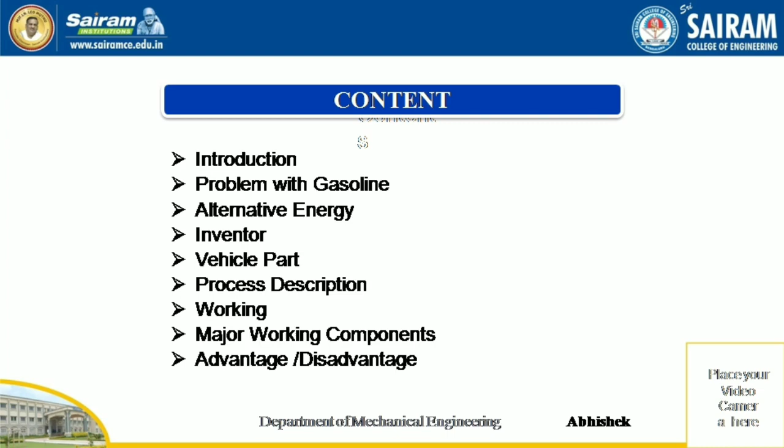Coming to the next point, we have the basic content of the topic. Firstly, we have a brief introduction about the vehicle, like why we have to use it, how we have to use it, and what outcome we will get by using this. Next, we have problems with gasoline, like what problems we are facing by using the gasoline product. Then we will discuss alternative energies, the inventor, vehicle parts, process description, working, major working components, advantages and disadvantages, and conclusion. Coming to the next point, we have an introduction on the topic.

In modern technology, transportation is done with fossil fuels like gasoline and petroleum products. But the main drawback is that we are addicted to fossil fuels due to increase in population. If this continues in future, by the era of 2035, we will run out of all fossil fuels and we can't afford it either.

But due to increase in population, fossil fuel sources are fast depleting and their combustion products are causing global environmental problems. So to overcome this crisis, air-powered vehicles were invented, which use air as a source. Even though air is a renewable energy resource, we can attain specifications comparable to other renewable energies.

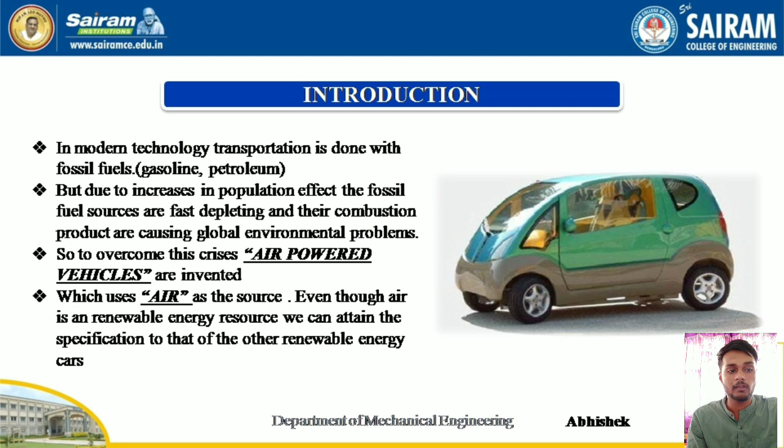Coming to the next point, we have problems with gasoline. The three main crises we may get by using gasoline are: first, it is expensive. You know how expensive gasoline products like petroleum and fuel are nowadays. Just think in the current scenario, what will happen in the future, in the upcoming 2035? We can't even afford it. So this may result in a major drawback of choosing the gasoline product.

The second one is non-renewable energy. Gasoline is a non-renewable energy, which means the source will deplete when we use it. For example, solar power or air is a renewable energy because we get it in abundant form even when we use it.

The third one is pollution. Vehicles are major pollution contributors, producing significant amounts of nitrogen oxide, carbon monoxide and other pollutants during the combustion of fuel. So by using air-powered vehicles, we can reduce the pollution of the surrounding environment.

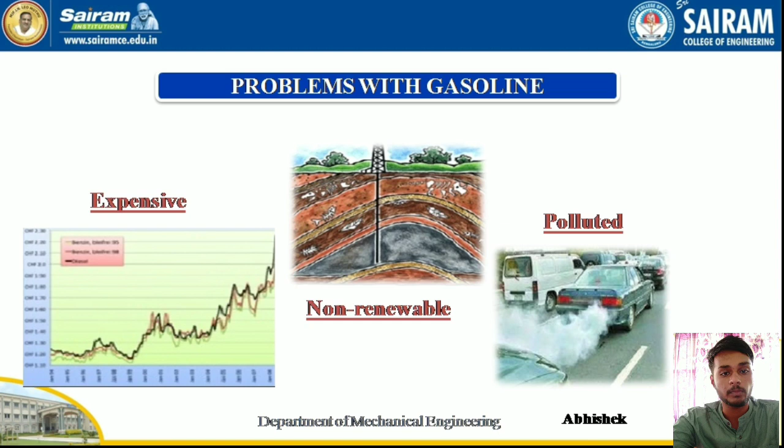Coming to the next point, we have alternative energies, which means instead of using gasoline products like petroleum and fossil fuels, what energies can be used to energize or power the vehicle? The first one is air energy, in which compressed air is used as a working medium. Through compressed air we can power the vehicle.

The second one is solar energy. With the help of a solar panel we can energize the vehicle. And the third one is electrical energy. With the help of batteries and so on, we can charge the vehicle.

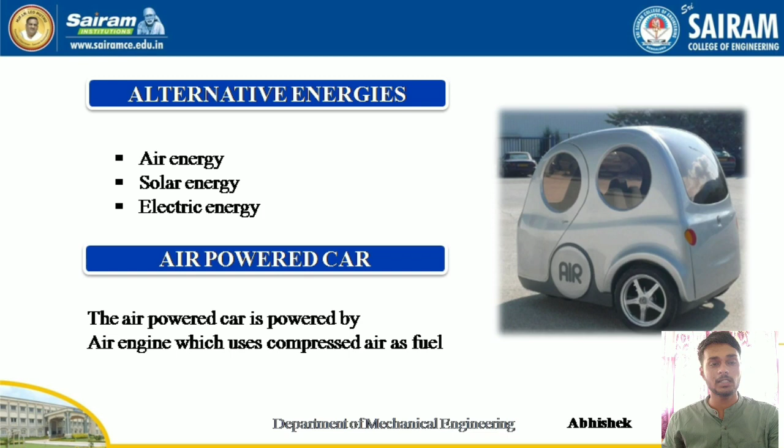After that, we are moving to the air powered car. The air powered car is powered by an air engine, which uses compressed air as fuel. Coming to the next point, we have the inventor.

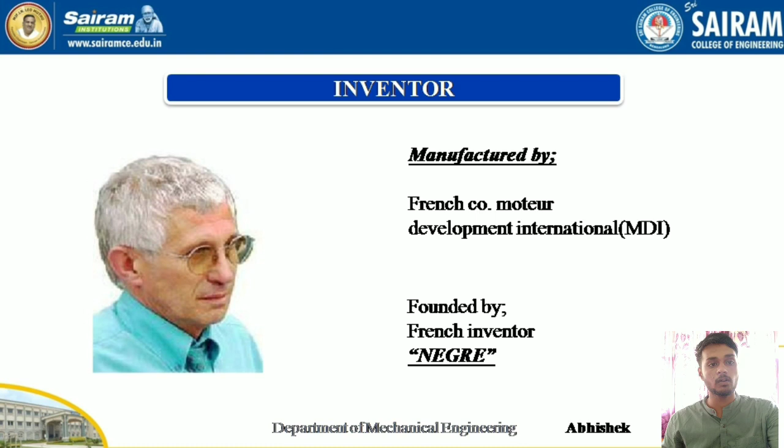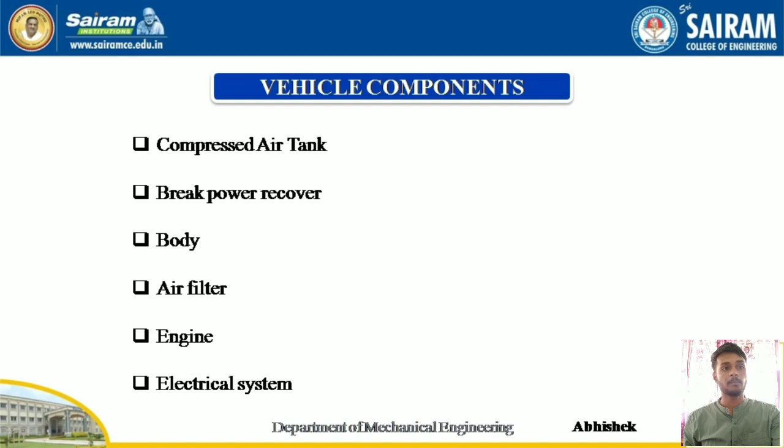Moving to the next slide, we have the basic vehicle components: compressed air tank, brake power recovery, body, air filter, engine, and electrical system.

Moving to the next, we will discuss the compressed air tank. The air tanks in an air-powered car are composed of an interior thermoplastic container which ensures it is airtight. This is held in a coiled and crossed carbon fiber shell. It holds 9 cubic meters of air. This tank can be ruptured but can't be exploded. This system is not dangerous in case of an accident as there is no risk of operation. They are made up of carbon fiber.

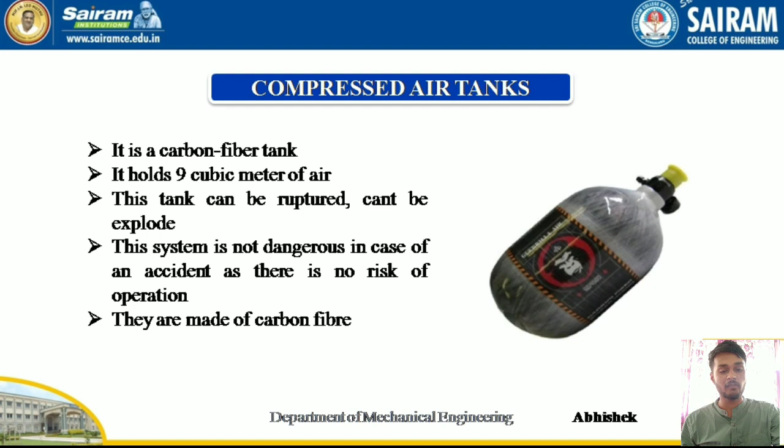The specifications of these tanks are: maximum effective pressure it can hold is 300 bars, temperature of use is minus 40 degrees Celsius to 60 degrees Celsius, and tank weight is 35 to 40 kg for 100 liters of air at 300 bars.

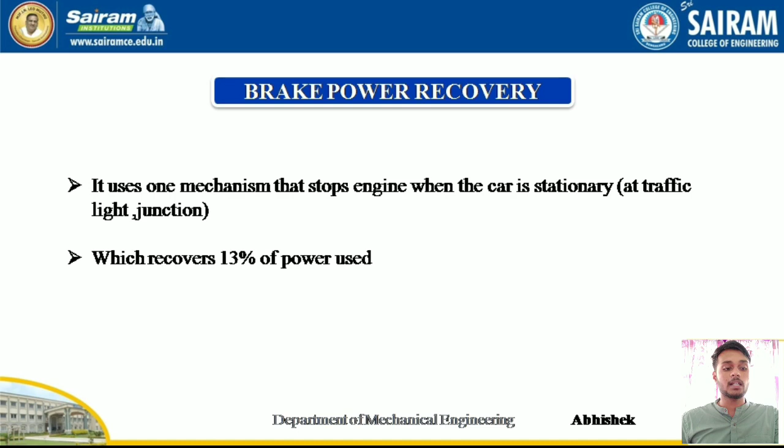With the compressed air tank complete, we move to brake power recovery. The MDI vehicle is equipped with a range of modern systems. One mechanism stops the engine when the car is stationary, for example at a traffic light or junction. Another interesting feature is the pneumatic system, which recovers about 13% of power used.

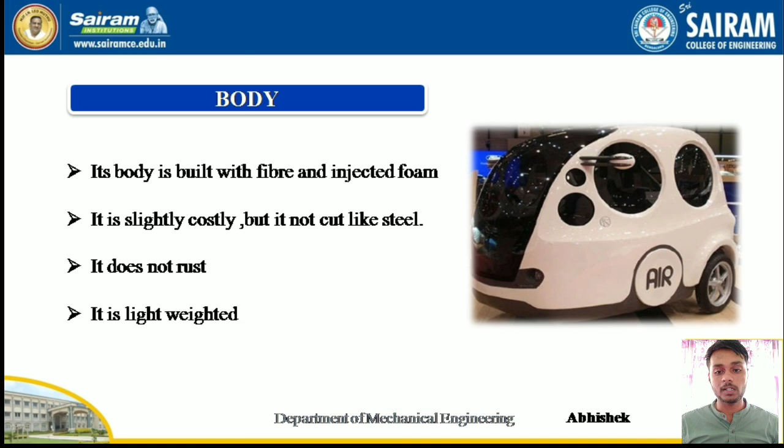Next, the body of the vehicle. The MDI car body is built with fiber and injected foam. Two main advantages are cost and weight; these are also major considerations for the vehicle. Nowadays, steel is used for car bodies mainly because it is cheaper to mass produce steel bodies than fiber ones. However, fiber is safer and easier to repair.

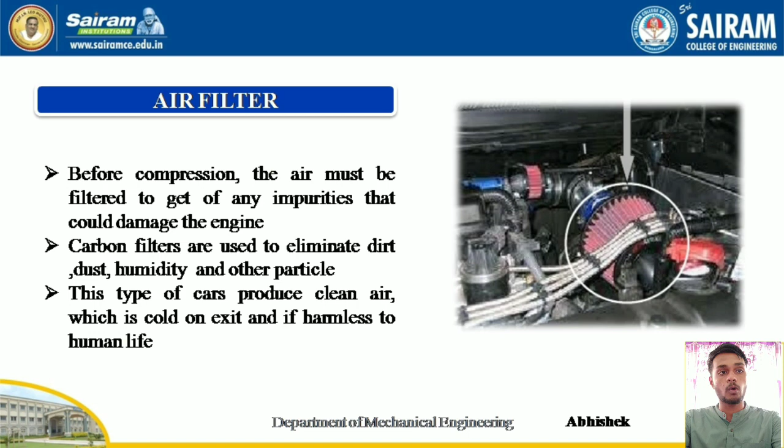Coming to the air filter, before compression the air must be filtered to get rid of any impurities that could damage the engine. Carbon filters are used to eliminate dirt, dust, humidity and other particles. The exhaust pipe on MDI cars produces clean air, which is cold on exhaust, for example between minus 15 degrees Celsius to 0 degrees Celsius, and is harmless to human life.

Moving to the engine of the vehicle, it has a 4-stroke engine that uses compressed air as fuel. The engine was developed between the end of 2001 and the beginning of 2002. It is a totally eco-friendly engine, and it becomes idle automatically when the car is stationary.

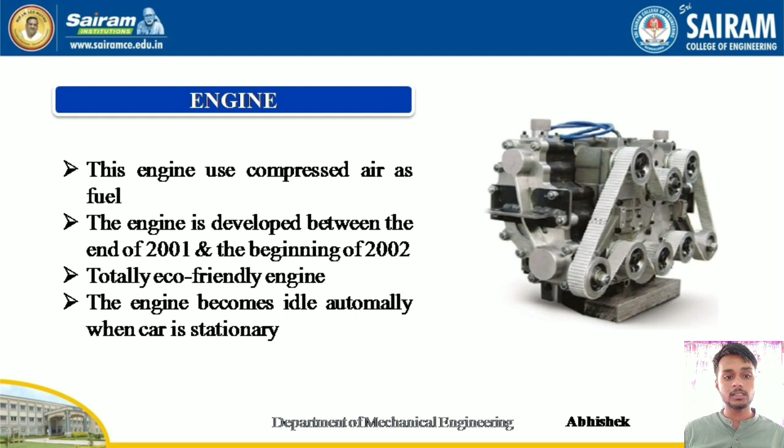Coming to the electrical system, only one cable collects all electrical parts like the headlight and dashboard inside the car. Guy Negre acquired the patent for an interesting invention for installing electricals in a vehicle using a radio transmission system. Each electrical component receives a signal via a microcontroller.

So instead of wiring each component like the headlight, dashboard light, and interior lights separately, one cable connects all the electrical parts in the car. Advantages include ease of installation and repair, and the removal of approximately 22 kg of wires no longer necessary. Also, the entire system becomes an anti-theft alarm as soon as the key is removed from the car. So the advantages of this electrical system are easy installation, easy repair, and removal of long cables.

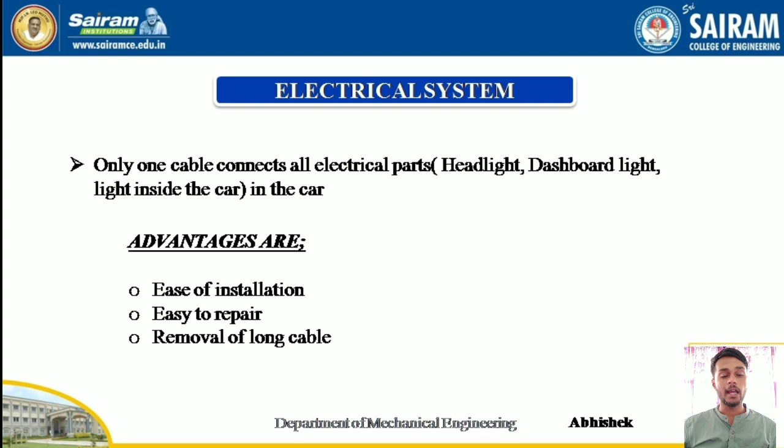Next, moving to the main body of the topic: how it works. Firstly, compressed air is stored in the fiber or glass fiber tank at a pressure of 4351 pounds per square inch. The air is fed through an injector to the engine and flows into a small chamber which expands the air. The engine has 4 two-stage pistons, that is 8 compression and expansion chambers, which have two functions: to compress the ambient air and refill the storage tank, and to make successive expansions by reheating air with ambient thermal energy, thereby approaching isothermic expansion. The air pushing down on the piston moves the crankshaft, which gives the vehicle power.

When the car is moving at a speed below 60 km per hour, it runs on air.

At higher speeds, it runs on a fuel such as gasoline or diesel. This compressed air can fuel the car up to 200 km at top speed. When the tank is near empty, it can be refilled at the nearest air pump.

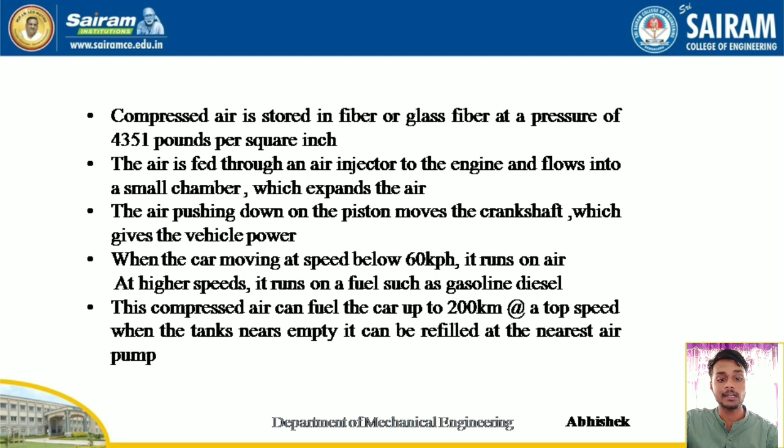This refers to how many ways we can energize the vehicle. There are 2 types of energy mode: first the single energy mode, and second the dual energy mode.

The single energy mode uses only compressed air as a working medium, and the maximum speed it can run is 60 km per hour. The single energy engine will be available in both Minicat and City Cat models, conceived for city users with a maximum speed of 50 km per hour, where MDI believes polluting vehicles will soon be prohibited.

The second is dual energy mode. It uses compressed air as well as fossil fuel as a working medium. At speeds over 50 km per hour, the engine will switch to fuel mode. The dual energy engine has been conceived as much for the city as for the open road, and is available in all MDI vehicles.

The engine works exclusively with compressed air while running under 50 km per hour in urban areas. Outside urban areas, at speeds over 50 km per hour, the engine will switch to fuel mode. Both engines will be available with 2, 4, and 6 cylinders. When the air tank is empty, the drivers will be able to switch to fuel mode using the car's onboard computer.

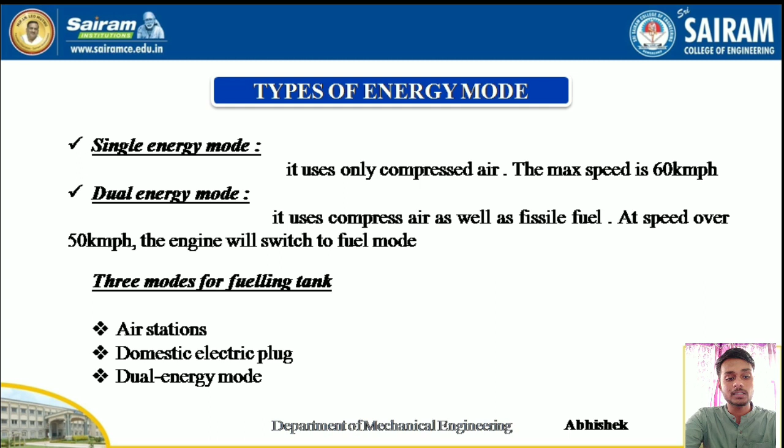Moving to air cars in India, Tata Motors on February 5, 2007 signed an agreement with Moteur Development International, known as MDI, a company from France, to develop the air car. The air car, called the Minicat, could cost around rupees 3,50,000 in India and would have a range of around 300 km between two refills.

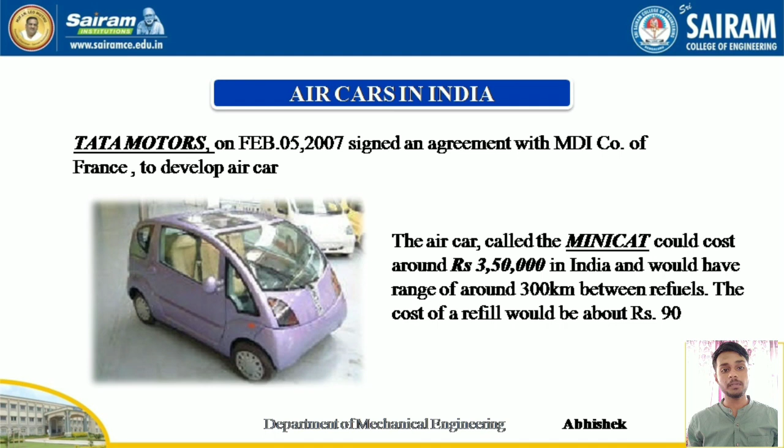The cost of a refill will be around rupees 90. Coming to the next point, we have air powered vehicle car models like the family car, van, Minicat, taxi, and pickup car.

Coming to the family car, it is designed a spacious car with seats which can face different directions. The vehicle's design is based on the need of a typical family. It includes airbags, air conditioning and 6 seats.

Coming to the dimension of the family car, the weight of the car is 750 kg. The maximum speed it can travel is 110 km per hour and it gives mileage of about 200 to 300 km. Maximum load is 500 kg and the recharge time is 4 hours.

Moving to the next model is the van, designed for daily use in industrial, urban or rural environments, whose primary drivers will be tradesmen, farmers and delivery drivers. It includes airbags, air conditioning, ABS and 2 seats.

Coming to the dimension of the van, the weight of the van is 750 kg. Maximum speed it can travel is 110 km per hour, as that of the family car. Mileage is about 200 to 300 km. Maximum load it can hold is 500 kg and the recharge time is 4 hours.

Moving to the next model is the taxi. Taxi inspired by the London taxi with numerous ergonomic and comfort advantages for the passenger as well as for the drivers. The specification of the taxi is airbags, air conditioning and 6 seats. Coming to its dimension, weight is 750 kg, maximum speed is 110 km per hour, mileage 200 to 300 km.

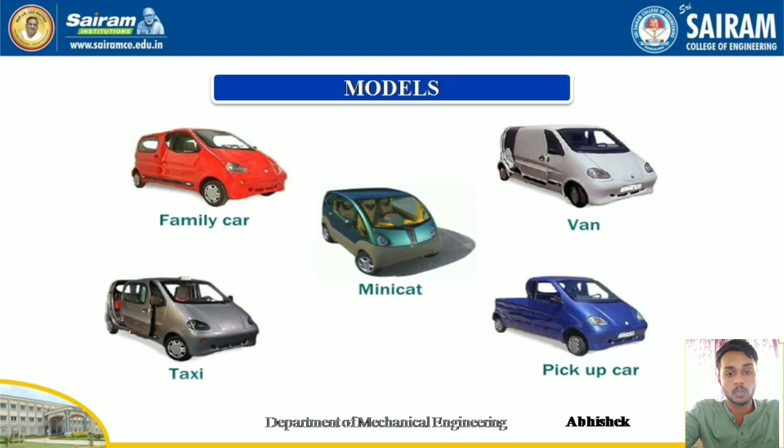The specification of the Minicat is airbags, air conditioning, it also includes ABS and it is a 3 seat vehicle. Moving to its dimensions, weight is 750 kg, maximum speed 110 km per hour, mileage is about 200 to 300 kilometers and the recharge time is 4 hours.

Coming to the important part of the topic, that is advantages and disadvantages of air powered vehicles. There are many advantages by using air powered vehicles. Firstly, it is economical, meaning the compressed air engine reduces the cost of the vehicle production because there is no need to build a cooling system, spark plug, starter motor or muffler.

It also reduces the hazardous chemicals which are emitted around the environment, such as gasoline and battery acid. Moving to the second advantage, it is pollution free. The air engine will not emit any dangerous chemical gases to the environment. By this we can control air pollution and moreover we will be in a healthy environment. By using air powered vehicles, we will feel better comfort than the other.

And the fourth is less maintenance. It is the main important advantage because whenever we are going to buy a car, we will see all the comfort firstly. We will think about the money and step back because we can't handle the money charges of the car, like services, oil and all. And the next advantage is easy to refuel.

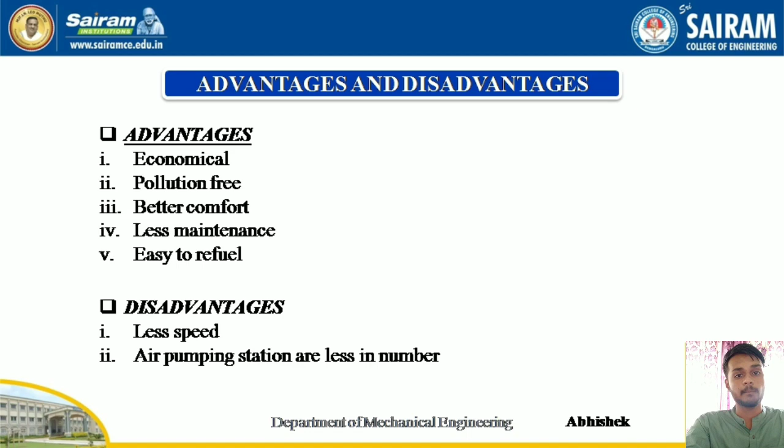Coming to the disadvantages, the main disadvantage is less speed. If you use compressed air, we can only run at 60 km per hour. And the second one is air pumping stations are less in number.

Coming to the final part of the seminar, that is the conclusion. Air powered car is a realization of latest technology in the automobile field. The air car is clean, easy to drive, lightweight and high performance. It eliminates the use of non-renewable fuel, thereby preventing pollution and is a step to a healthier environment.

The Mexico government scheduled to replace 4,500 cars by air cars in the highly polluted area of their country. The principal advantages of an air powered vehicle are fast recharge time and long storage lifetime. For example, electric vehicle batteries have a limited useful number of cycles and sometimes a limited calendar lifetime, irrespective of use. There is also potential for lower initial cost than battery electric vehicles when produced.